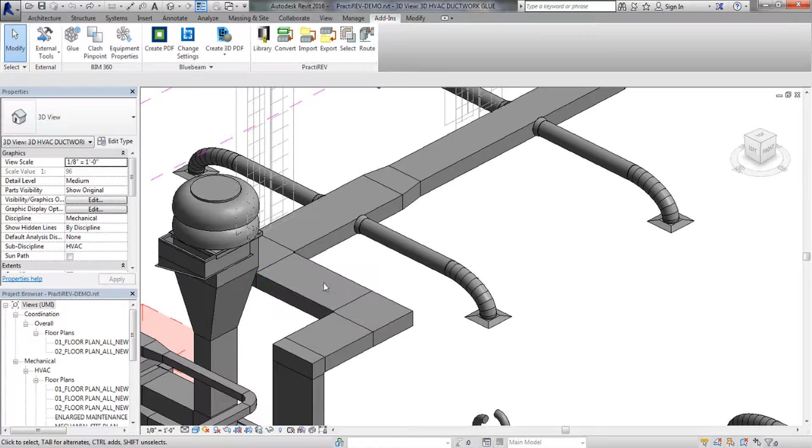Besides being able to import a drawing from PractiCAD into Revit, PractiREV also has the ability to convert and export. This means we can take a Revit drawing and convert it into PractiCAD or PractiCAM. To demonstrate this, we're looking at a sample engineered drawing with no joints, flanges, or manufacturing data within the drawing.

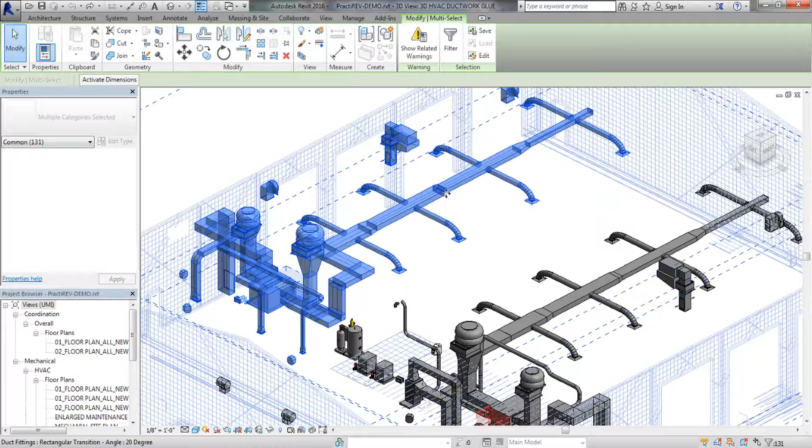First step is to select what we want to convert. This can be done with PractiREV's add-in selection tools, or you can use the Revit selection tool. Notice here we're just going to tab over this drawing and grab a hold of our first duct line.

Once we have highlighted what we want, we can go to the PractiREV toolbar and press Convert. This will open up the conversion window. Here you can see we have choices for only showing items in takeoff and only showing unmapped items. You'll also see that PractiREV displays pictures of all the items that were selected and has a little checkbox next to each one. If it's checked, it's already mapped. If it's not, it needs to be.

Next step is to simply map the unchecked items from a Revit family to a fitting you want to use in PractiCAD. In this demo, we will map a piece of Revit straight duct to PractiCAD straight duct, then a group of Revit transitions to a PractiCAD transition, and lastly, we will map a Revit conical to a custom PractiCAD conical catalog we have made from a reducer fitting.

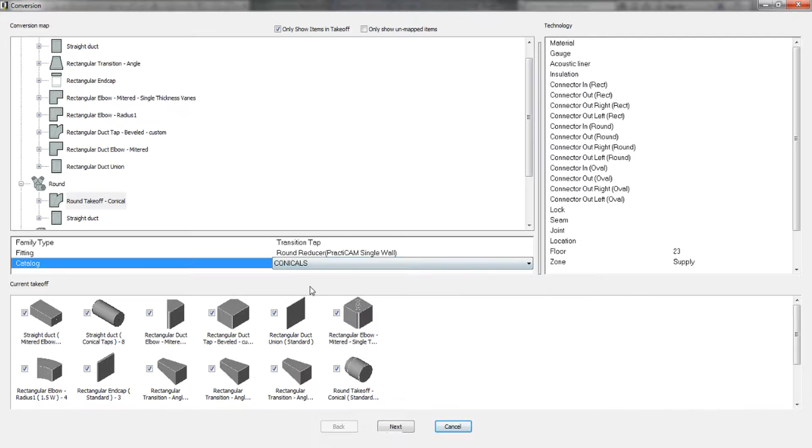Once we've mapped everything we need, we will then select parameters like zone and specification. It is important to point out that all data from PractiCAD and CAM imports into PractiREV and can be used. So here we're going to select the 4-inch TDF specification so we can apply it to all fittings in our selection. Once this is done, we press Next.

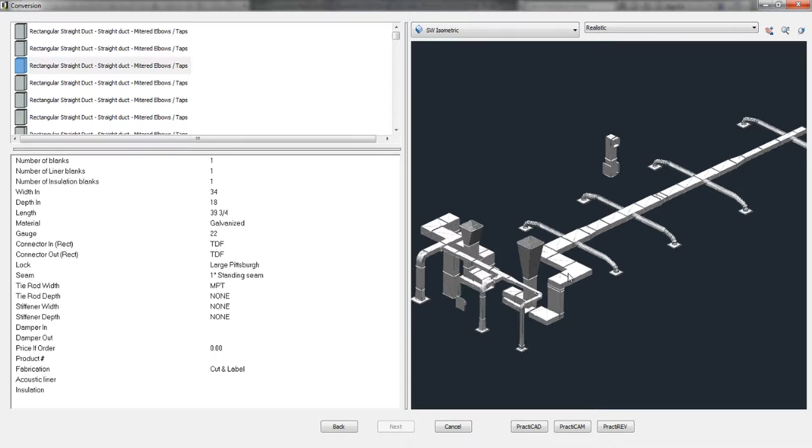Now you notice here PractiREV displays the duct on the right in whatever view we choose and has applied our specifications to everything. Now all our manufacturing parameters are ready. However, notice you can still select fittings on the left and even adjust the parameters of individual fittings here.

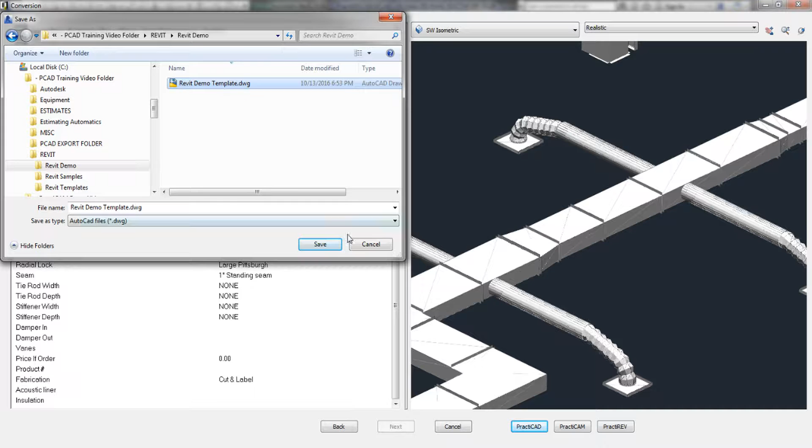Now we have to ask ourselves, what do we want to do? Export to PractiCAD, PractiCAM, or PractiREV. We can currently do all three. For this part of the demo though, we're going to convert this to PractiCAD. So we press the PractiCAD button and then save this section of the drawing to the background of our choice.

Once we accept and hit OK, PractiREV will show us how many items have been saved and converted, and the drawing is ready to go. Take a look at this drawing now converted into PractiCAD. You can see here that everything has been converted, and we have our duct on the right layer and with all proper manufacturing standards.

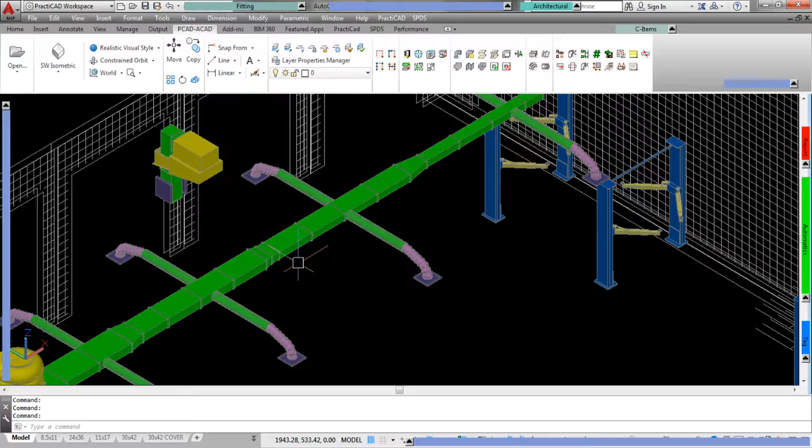Now let's go back to our Revit model again and highlight the second line we would like to convert. We tab over it, grab what we need, and hit the PractiREV Convert button again. Notice here that as we scroll through our fittings, everything is already checked this time. This is because once you've mapped the Revit fitting to a PractiCAD fitting once, it stays mapped forever, even between drawings.

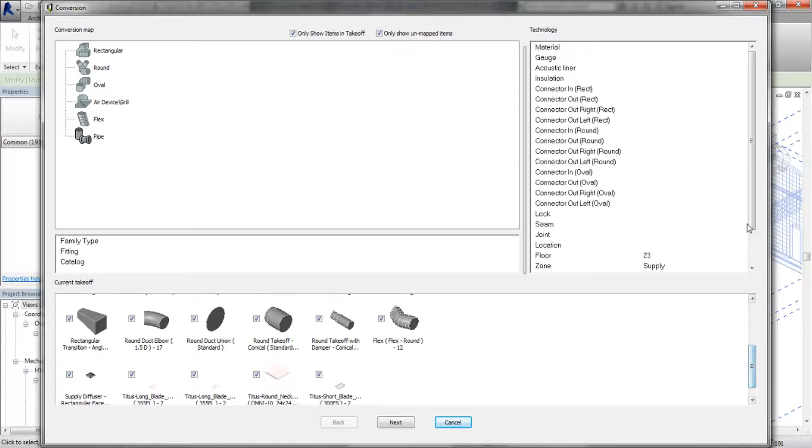As before, the next step now is to choose properties like zone and specification. For this second line though, we're going to make it a return run and a 2-inch slip and drive spec. Then we'll hit Next, and this brings us back to our preview window where we can see PractiREV has converted the Revit line with the proper manufacturing specifications we asked for.

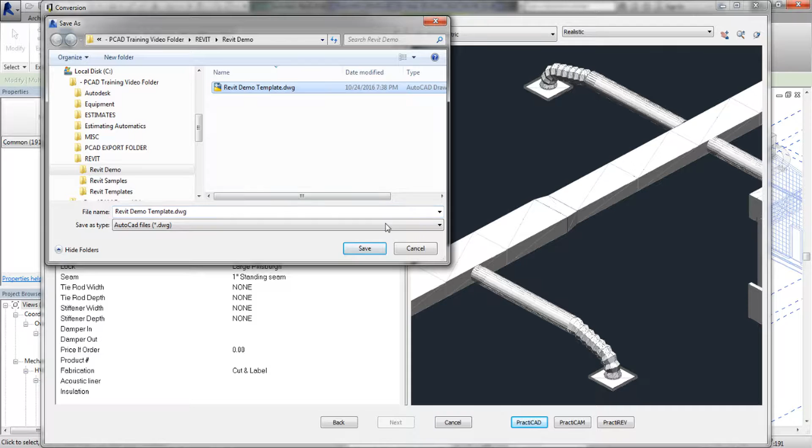Once again, we simply save this, and then we're going to append this line to the existing drawing we had before. PractiREV will now show us how many fittings we have converted over, and we're ready to go back to our PractiCAD drawing. Looking here, we can see that we again have all our proper manufacturing data applied. The duct is on the proper layer based on our preferences, and it's ready for editing.

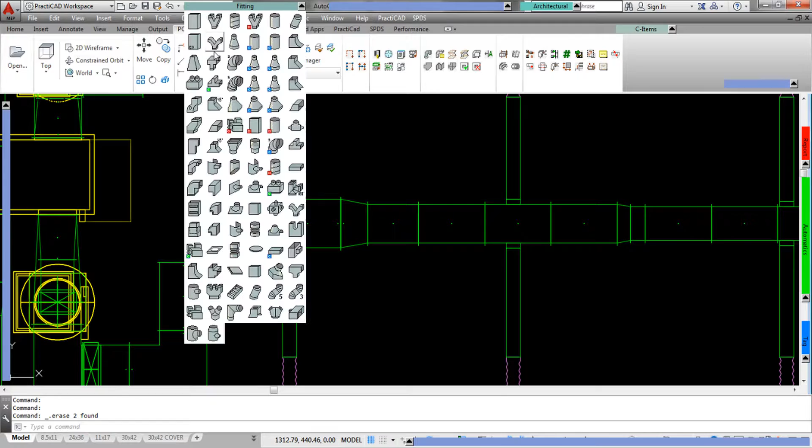If you've seen the PractiCAD program before, you would know that PractiCAD offers extensive editing capabilities, allowing the user to modify and change anything they may desire quickly and easily. Using these capabilities, we would simply modify the things on the drawing we want to change from the original engineer's model, and PractiCAD will update our drawing as we go.

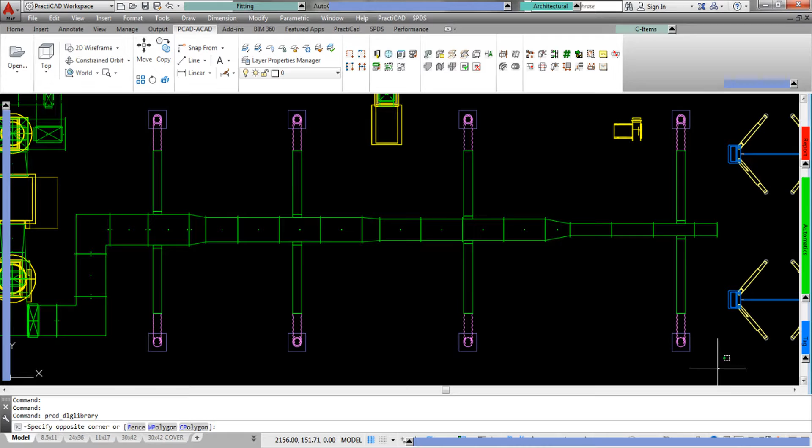Once this is complete, we can then use any other feature that PractiCAD has. For example, imagine we'd like to tag and annotate this drawing with size tags or possibly elevations. Using PractiCAD's tagging automatics, all we have to do is highlight the area we want to tag and press our tagging automatic button once. And yes, you are seeing this in real time.

Next, we'll run a different automatic for piece numbering. We simply highlight what we want to number, press our one-touch automatic, and now your drawing is numbered as well.

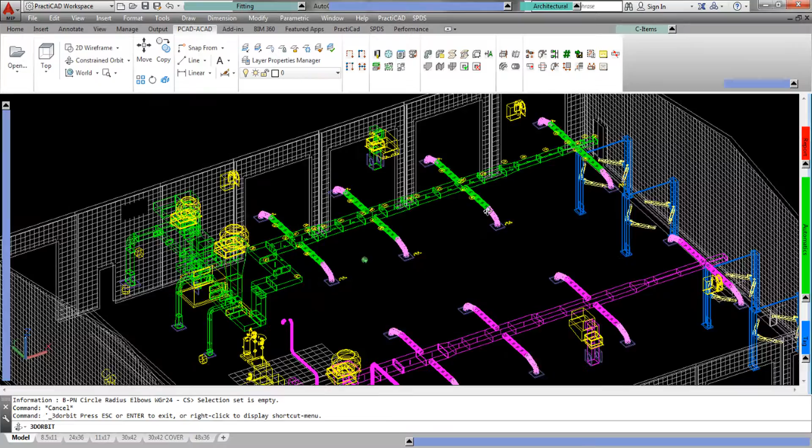Now we're going to simply orbit our drawing and take a look at it to make sure that everything is ready to build. If it is, we can now use PractiCAD's downloading capability to send all of these fittings to our manufacturing software, PractiCAM. This will complete the entire design to fabrication process.

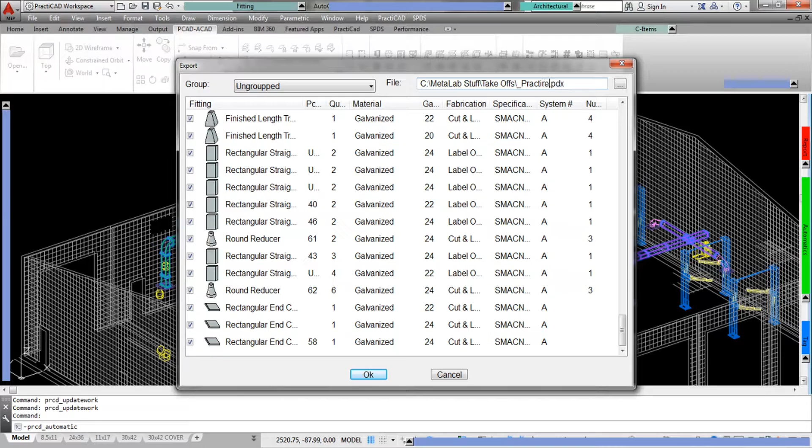Watch here as we highlight what we want to send over and press Export. When we do this, PractiCAD will list everything here we are about to download. We will confirm what we want to send and then name this job PractiREV. Now we are just one click away from downloading everything from PractiCAD straight to the PractiCAM program.

Coming over to PractiCAM, you can see here that everything we wanted was downloaded direct to fabrication and is now ready to burn. Here, we should also mention that with the addition of MetaLab's PractiEST, we can even get the estimate for the entire job.